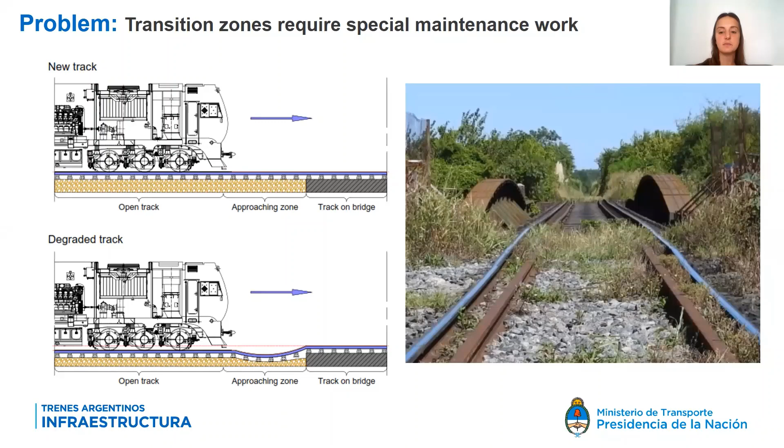To date, transition zones are designed in Argentina to provide a gradual stiffness increase in the open track, in order to gradually match the stiffness of the track over the bridge.

For the renewal of a bridge placed in a busy line where no other works are needed in the surrounding platform or tracks, the activities are generally organized during service cuts. Unfortunately, these solutions sometimes present an incompatibility between the time necessary for soil treatment works and available working hours. As a consequence, the quality of the works is not always the best, which leads to rapid degradation of transition zones.

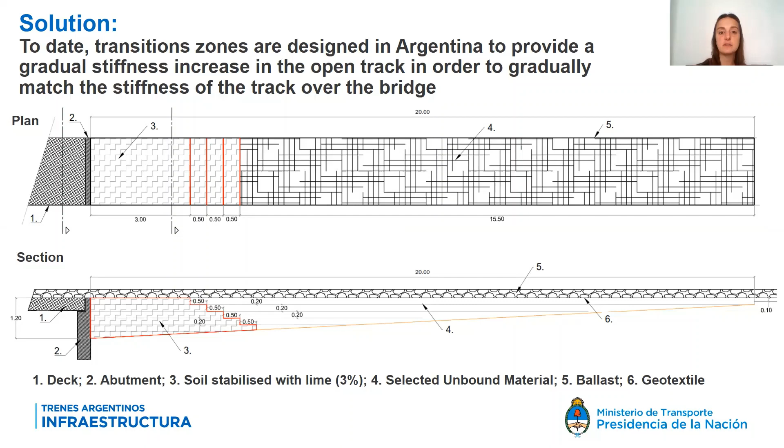The present study intends to analyze the performance of an alternative solution installed in a bridge as a trial, which offers a quicker installation time and solves the problem of differential settlements by using an elastic mat under the ballast, a UBM, placed over the bridge, and elastic pads under the sleeper, USP, to gradually decrease stiffness of the track.

For this study, both materials were provided by Getzner through its national technical representative, Rail Center by voestalpine.

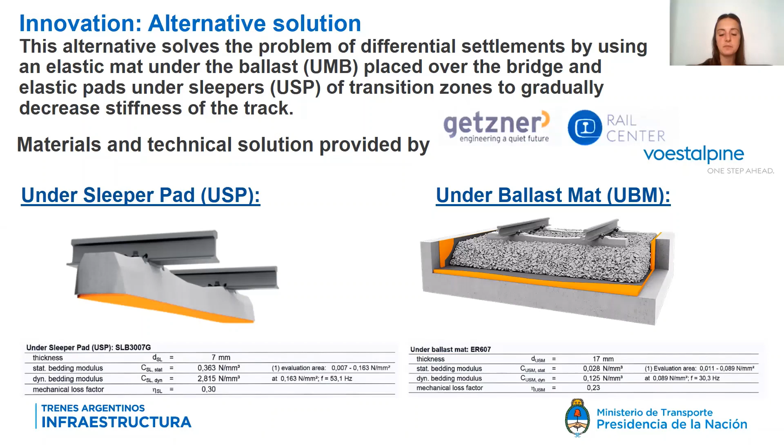The technical solution presented here was designed considering the load, speed, and features of the track. The drawing shows the distribution of the under-sleeper pads along the transition zones and the bridge. On the other hand, the under-ballast mat is only installed on the deck of the bridge, which has a length of 12 meters.

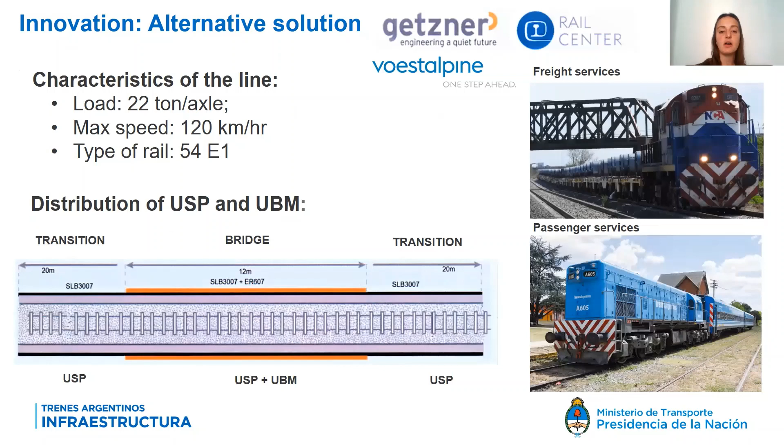In order to evaluate the performance of the solution, two concrete bridges will be monitored: one which presents traditional transition zones, Bridge A, and another that uses the mentioned alternative solution, Bridge B. Both bridges are installed in the same track and have the same passenger and freight traffic. The obtained results for both bridges will later be compared in order to evaluate if the second option improves or at least equalizes the performance of the technical solution used in our country up to the present time.

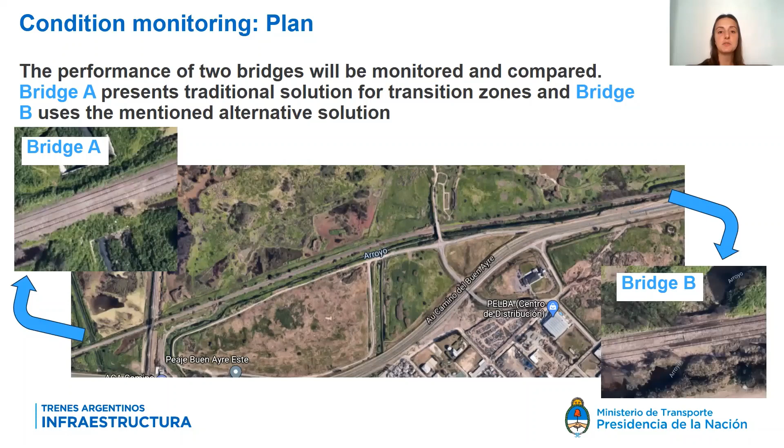Both bridges were precast in order to reduce in-situ works and, as a result, the time required for installation. On the left-hand side, there is a picture of the soil treatment works needed for the installation of Bridge A. As you can see, traditional transition zones require a complete renewal of the surrounding platform and important in-situ efforts.

For Bridge B, only a plate test was needed in order to check if the stiffness modulus was more than 80 megapascals. Moreover, as can be seen on the right-hand side, USP and UBM were glued to the sleeper and to the deck before installation, which undoubtedly reduced the time necessary for the activity.

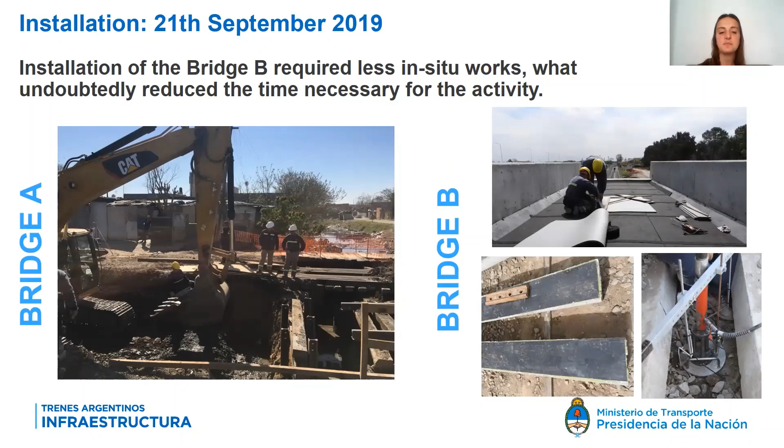For the development of an integral analysis along a trial period, regular visual inspection of the transitions will be carried out, measurement of permanent vertical levels will be taken, analysis of ballast grading and ballast fouling index will be developed, and finally, measurements of vertical transient displacement at different locations of the transition zone will be analyzed.

Moreover, the cumulative tonnage associated with railway services that monthly circulate along both bridges will be recorded in order to have an idea of the expected level of deterioration.

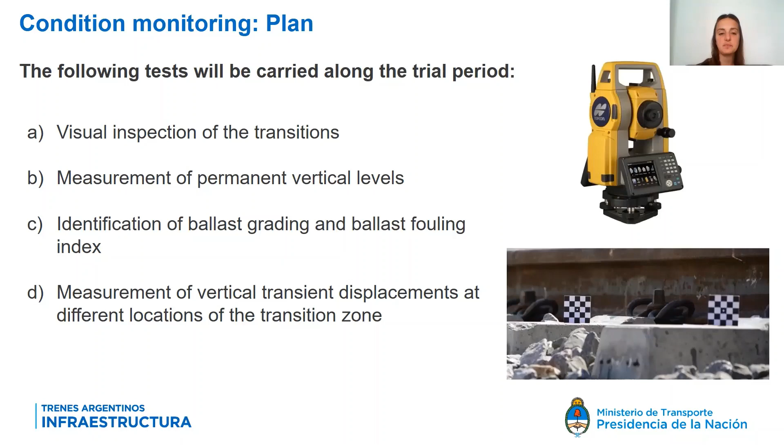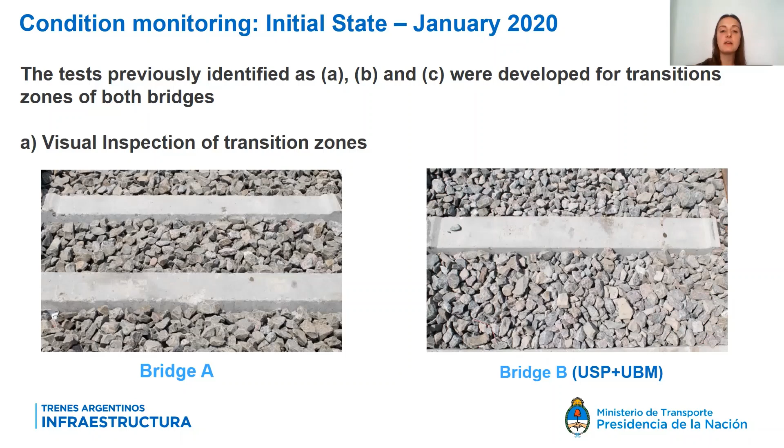To record the initial state, tests previously identified as A, B, and C were performed for transitions of both bridges in January 2020. Here we can see two photographs of the transition zones of Bridge A and B. Both of them show a recently constructed track.

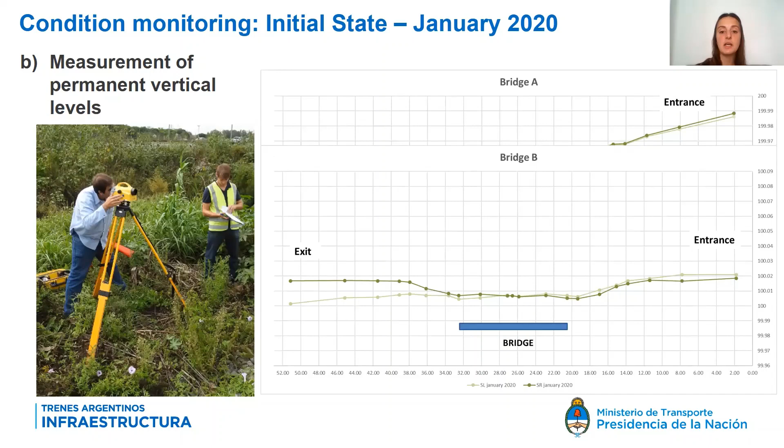Regarding track geometry, permanent vertical levels for both rails, left and right, were recorded for the initial state of both bridges. As can be seen from the plot, Bridge A is located on a slope. Instead, Bridge B, the one with USP and UBM, is located at the entrance of a transition curve. Consequently, we can see how the right rail goes up at the exit of the bridge in order to provide the required cant to the track.

Regarding ballast breakdown, some authors indicated that an important breakdown of the ballast occurs at the exit of the bridge. Following this recommendation, two samples, one for Bridge A and another for Bridge B, were taken at 1.3 meters from the end of the deck.

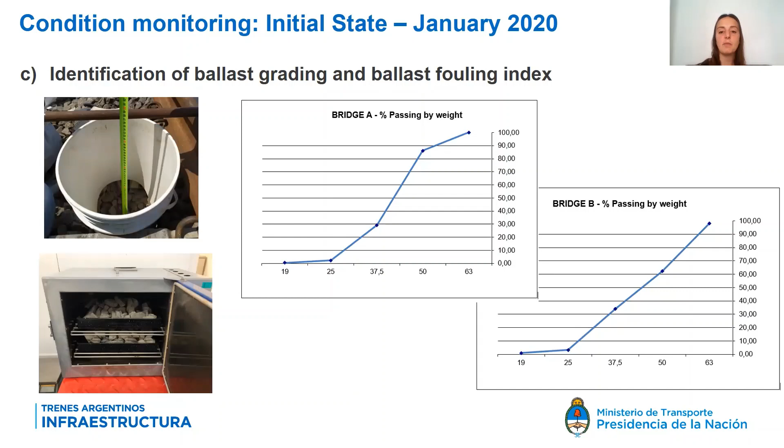The AREMA manual of railway engineering was used to define the depth of the sampling and to calculate the ballast fouling index. As the manual says, a fouling index smaller than 1 can be associated with clean ballast, so we can conclude that both bridges present clean ballast.

Finally, from the obtained records in A, B, and C during this initial state, it can be concluded that both transitions seem to present similar characteristics, with no way to identify from the results which bridge presents each of the technical solutions.

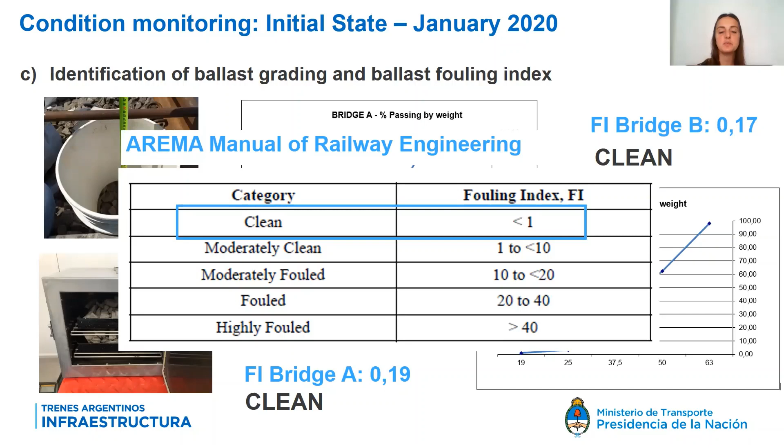One year after installation, during September 2020, tests previously identified as A, B, C, and D were repeated for transition zones of both bridges. Moreover, vertical transient displacement at different locations of transitions, measured with photogrammetry and accelerometry techniques, were analyzed.

One of the most important aims of this test is to evaluate if the alternative solution solves the typical issues presented by traditional transition zones, such as the presence of hanging sleepers.

Before starting, we analyzed the cumulative tonnage associated with passenger and freight services. The information was provided by the Traffic Control Department of Trenes Argentinos Operaciones. It is important to consider that 2020 was a special year with limited passenger and freight services due to COVID-19. As a consequence, the cumulative tonnage resulted lower than expected.

Then we carried out a visual inspection of both transition zones. From the photographs, it could be observed that there is no visual degradation in any of the analyzed transitions.

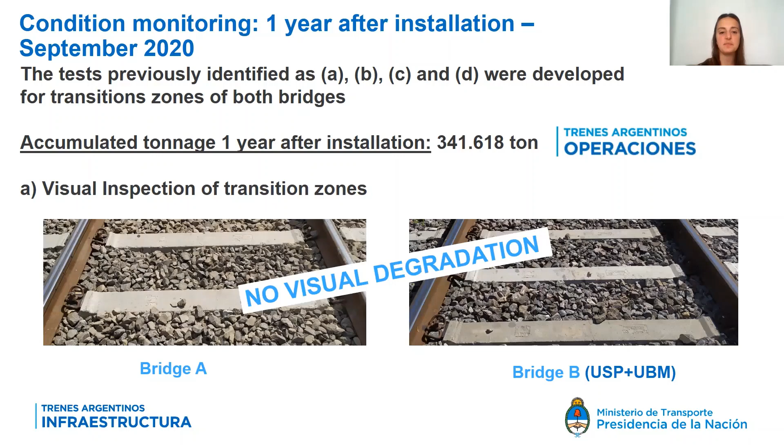Here we can see the plot of vertical levels for bridge A, and here the plot for bridge B. If we compare permanent vertical levels measured in September with the ones obtained in January, it can be observed that top level for bridge B went down 5 millimeters more than levels of bridge A.

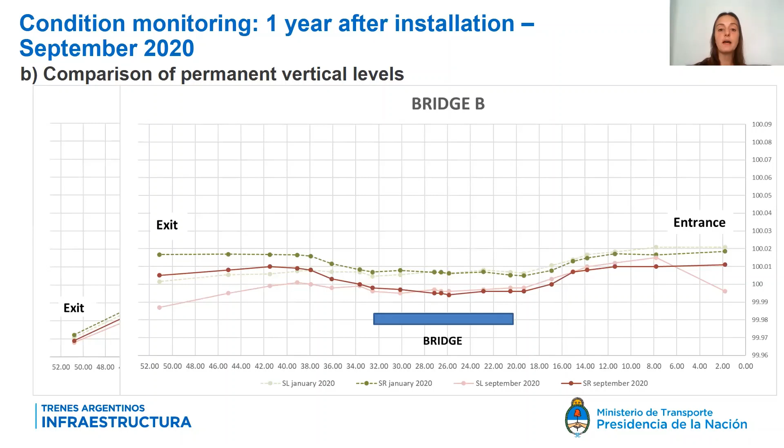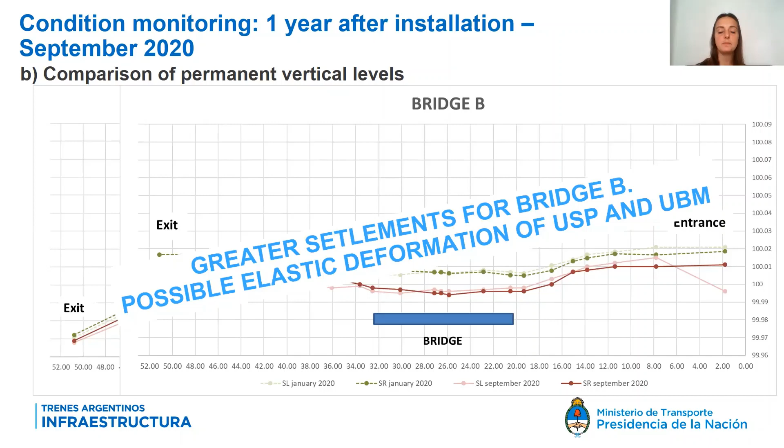We think that the greater settlements may be related to elastic deformation of USP and UBM, which allows ballast particles to encrust on them.

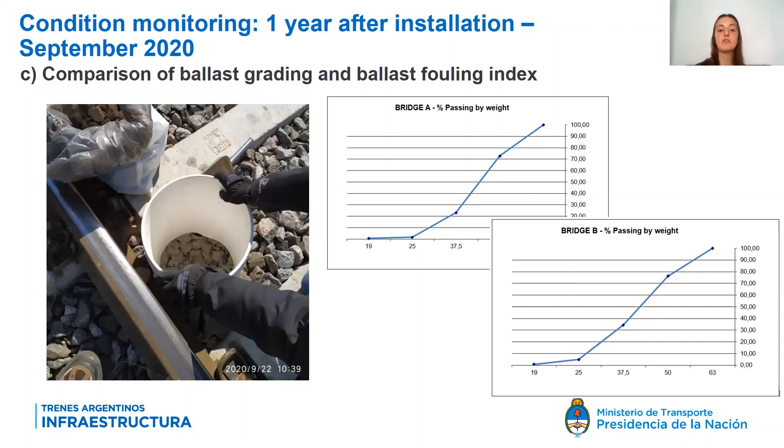Regarding ballast quality, two more samples were analyzed, obtaining for both of them the grading and the fouling index. As it can be seen, the fouling index for both bridges, again, can be associated with clean ballast.

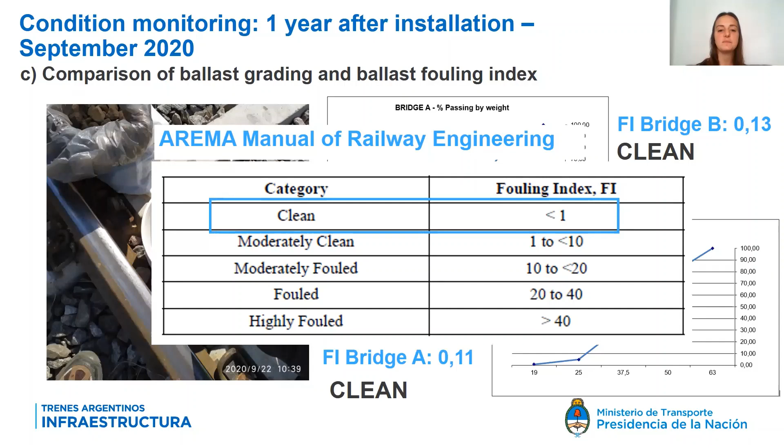Finally, for the measurement of vertical transient displacement, photogrammetry and accelerometry techniques were used. Following recommendations of other authors, displacements were measured at the entrance of both transition zones. The main purpose of this test is to compare how the deflection of the track and consequently its stiffness change for both solutions along transitions.

As mentioned before, it is important to evaluate if the alternative solution solves the typical issues presented by traditional transition zones, such as the presence of hanging sleepers. Moreover, based on previous studies, it will be of special interest to analyze if the solution that combines the use of UBM and USP shows a better performance than those solutions where only UBM or USP were used.

The accelerometry technique was implemented by Trenes Argentinos Operaciones, who provided the equipment and the know-how to develop the measurements and collaborated with the present study.

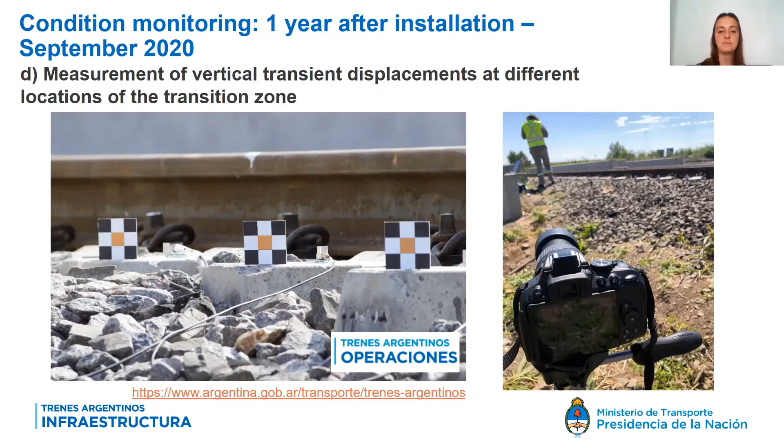We can see here a video recorded for Bridge B, the one with USP and UBM, when the locomotive passed by.

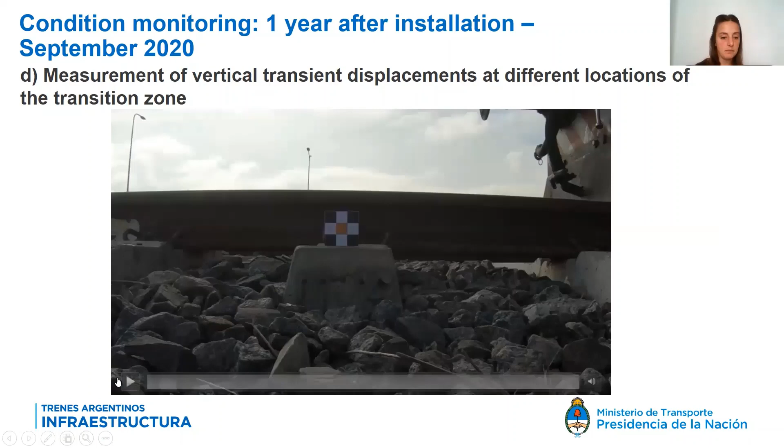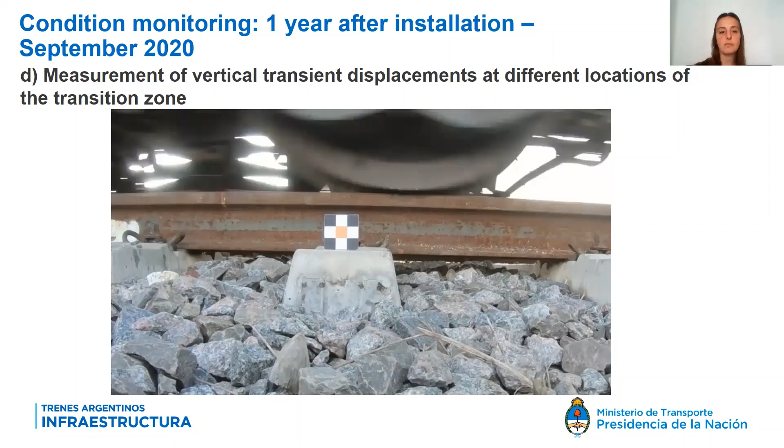Here, on the left-hand side, it can be seen the location of the measured sleeper for Bridge A, and on the right-hand side, the obtained result for displacement in millimeters.

Looking at the results, it can be observed that there is a difference between the results obtained using photogrammetry and accelerometry. Therefore, we think that more effort needs to be done in order to improve both methodologies.

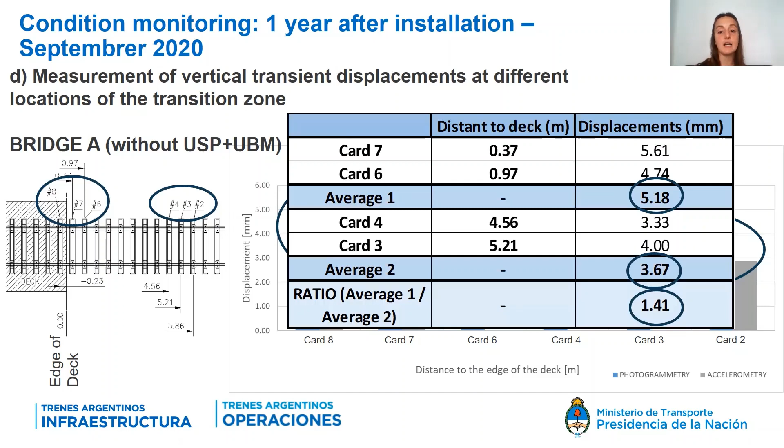In this way, a ratio of 1 can be associated with a perfect condition, and as the transition degrades, the ratio increases. We calculated the average of rail displacement for cards 6 and 7, near the deck, and the average for cards 3 and 4, located between 4.5 and 5.7 meters from the deck, obtaining a ratio of 1.41, which can be associated with a good condition of track.

Analyzing the results for Bridge B, it can be observed that displacement for sleepers near the edge of the deck are between 8 and 10 millimeters. On the other hand, displacement for cards 2, 3, and 4 are around 6 millimeters.

As expected, transient displacement for Bridge B are greater than those measured for Bridge A, probably due to the elastic response of USP and UBM. Moreover, displacement for sleepers near the bridge where the UBM is installed present greater displacement than those with only USP, confirming what was expected.

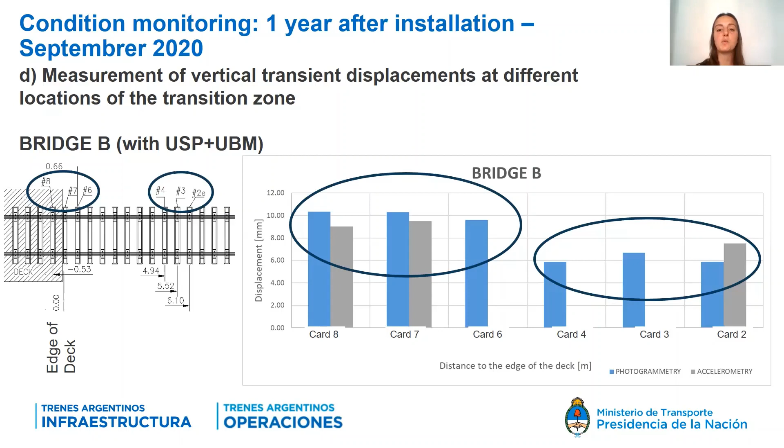Finally, we again calculated average 1 and average 2, obtaining a ratio for Bridge B of 1.58, which can be associated with a good condition of track. This test will be repeated in the following years for both transitions in order to evaluate how this ratio changes as the degradation increases.

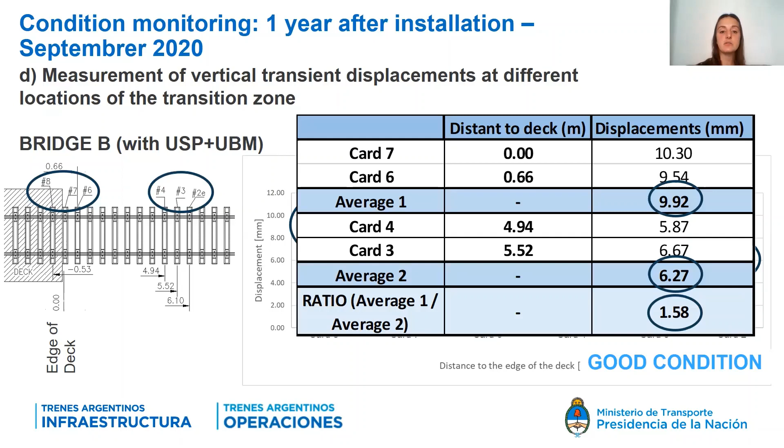In conclusion, the main purpose of this study is to evaluate if the alternative option that uses USP and UBM improves or at least equalizes the performance of the technical solution used to date in our country. From the works, it can be concluded that the installation of Bridge B requires a shorter period of suspension of railway services, which is a great advantage when the time available is limited. In addition, the alternative solution has not shown negative effects to date.

However, the cumulative tonnage was very low during 2020. As a consequence, the degradation of the track is not remarkable. More effort needs to be done in order to improve the accuracy of the displacement values obtained using photogrammetry and accelerometry.

This study needs to be continued in the following years in order to evaluate how both transition zones perform as accumulated tonnage increases. For the future, it will be ideal to design a matrix that considers construction cost, time limitation for installation, expected accumulated tonnage, and maintenance cost, among other aspects, in order to choose the best alternative for each special situation.